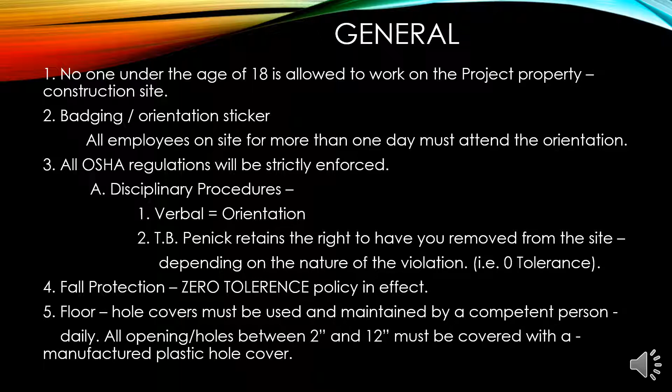Fall protection: 100% tie-off required at 6 feet and above. Zero tolerance will be practiced on all fall protection violations. A full body harness and proper connector equipment shall be used.

Fall protection gear is to be inspected prior to every use and every 6 months by a competent person. Do not use damaged gear. Tie-off point must be able to withstand 5,000 pounds of force.

100% tie-off when working from boom lifts. Employees must be trained on the use of fall protection gear.

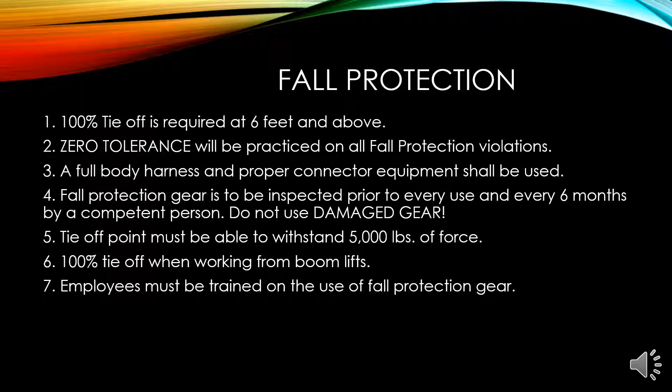Fall protection continued - scaffolds: must be built under the supervision of a competent person who is capable and authorized by employer. Fall protection must be used while erecting scaffolds. Exceptions must be approved by TB Penick & Sons Incorporated.

Standard railing: top rail must be at a height of 42 inches, plus or minus 3 inches, above the working level. Do not tie off to guardrails.

Ladders: No aluminum or painted ladders are permitted on the job site. Inspect ladders before each use. Only type 1A and 1AA ladders are to be used on the job site.

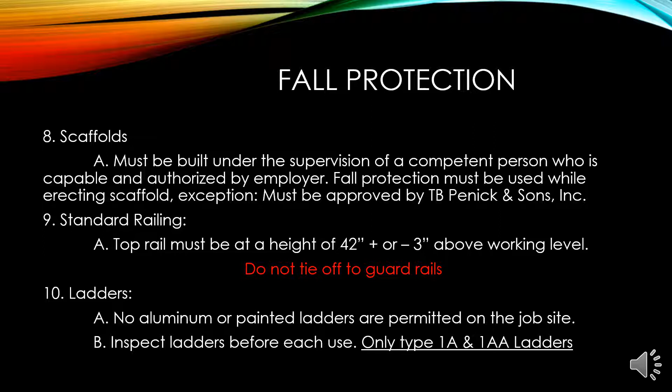Fall protection continued - never use an A-frame ladder as a straight ladder. Never stand on or above the top 2 steps or the top cap of a ladder. Never store materials or tools on the steps of a ladder.

Employees shall be trained on ladder use and safety. Use the 3 points of contact rule while climbing or descending on a ladder. Do not carry materials or tools while climbing a ladder.

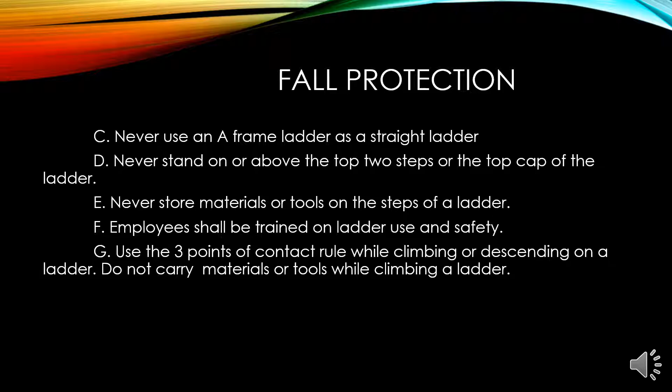Safety enforcement: all personnel are encouraged to ask questions and report hazards. If you are not sure if it's a hazard, please ask TB Penick & Sons supervision to clarify. If you have any questions or concerns, please ask for assistance.

There is a safety enforcement fine system in place on this project. You are accountable for your actions on this project. You will be physically removed from the job site for a gross violation or repeat violation.

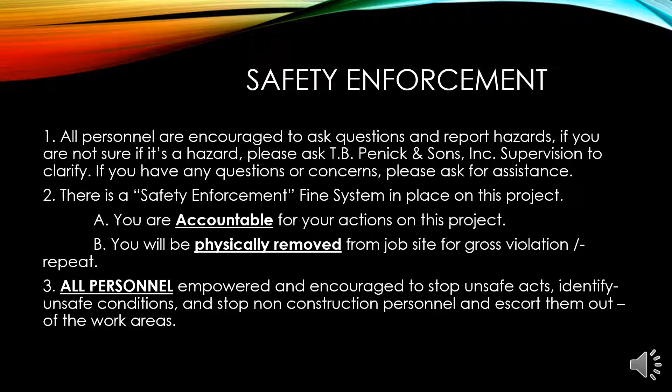All personnel are empowered and encouraged to stop unsafe acts, identify unsafe conditions, and stop non-construction personnel and escort them out of the work areas.

Emergency procedures: in the event of an emergency, notify job foreman immediately and/or TB Penick project superintendent or safety manager. Give the exact nature of the emergency, for example employee injury, fire, etc.

Give the exact area by floor, room number, north, east, west, or south side of the job site. Stay on the phone until safety has confirmed that you have provided accurate information. If an evacuation is not necessary, stay on the scene to provide incident information if needed.

Emergency procedures continued - evacuation procedures: 3 horn blasts will indicate the job site is to be evacuated. Proceed in a calm manner to the evacuation safe zone. Muster points for evacuation will be briefed.

Report to your designated supervisor or foreman for a head count. Do not leave the safe zone or go home until instructed by your supervisor.

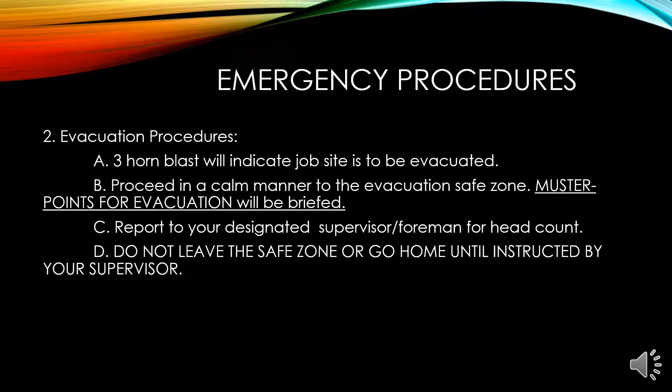Personal protective equipment basics. 100% hard hat protection is required at all times. 100% eye protection, ANSI Z87.1, is required at all times.

Safety-toed work boots are required, no soft shoes allowed. Long pants in good condition must be worn, no shorts. Shirts must have sleeves at least 4 inches long.

Glove protection is required where hand hazards are possible or exist. Ear protection is required in environments above 85 decibels. Face shields are required when cutting, grinding, chipping, etc. Safety goggles are required when operations produce flying hazards, such as from stripping forms or shoring.

High visibility Class II clothing must be worn on site at all times.

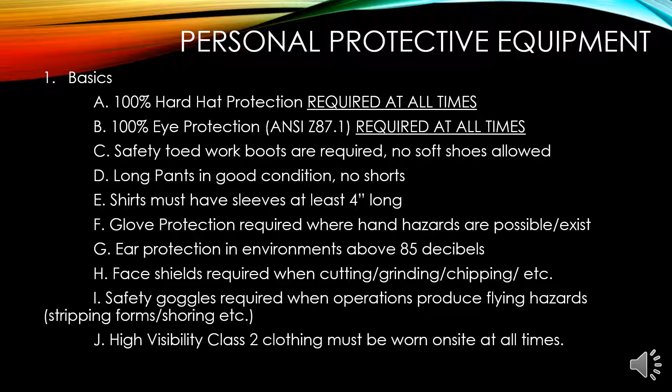Electrical: industrial heavyweight cords with proper grounds are to be used at all times, with 100% ground fault circuit interrupter (GFCI) protection. Inspect all cords and welding leads before each use.

Damaged items must be repaired or removed from the job site. All leads and cords are to be elevated above all main walkways.

All mechanical and electrical systems are to be considered live. Never work on live panels without prior approval from TB Penick, and without following the proper procedures and precautions outlined in the NFPA, NEC, and safety orders.

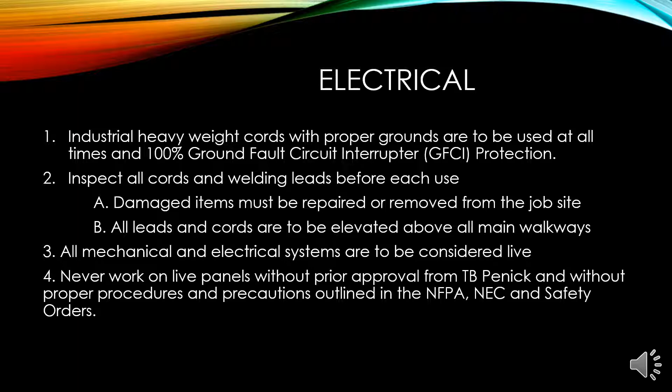Equipment: proper training and certification is required prior to operating equipment. All stops must be observed at intersections and must come to a complete stop. Speed limit is 5 miles per hour or a safe operating speed, whichever is slower.

A spotter is mandatory when view is obstructed by load. Backup alarms are required on all vehicles. No passenger riding on equipment or on the back of trucks or pickup trucks.

Horns and lights are recommended for all equipment. Always follow the manufacturer's operating instructions for all equipment and tools used on this project.

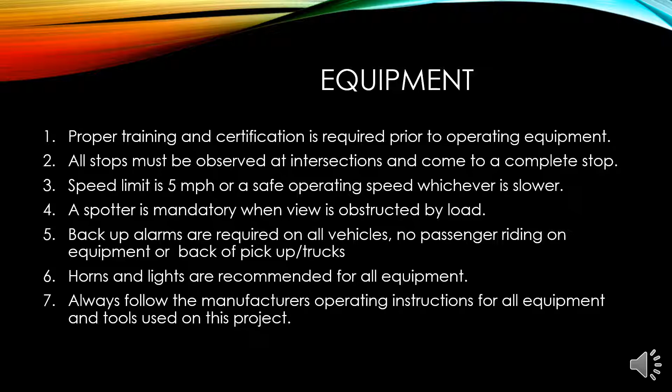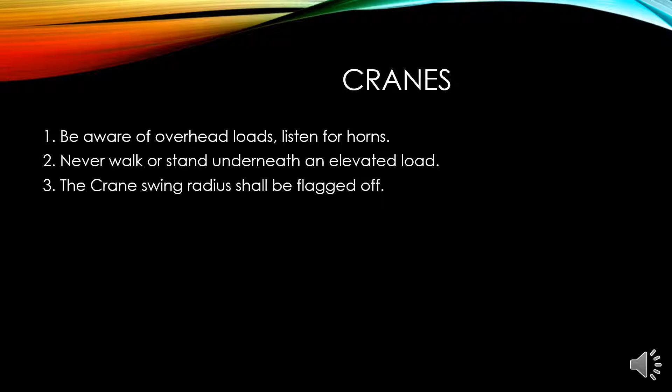Cranes: be aware of overhead loads and listen for horns. Never walk or stand underneath an elevated load. The crane swing radius shall be flagged off.

Barricade tape: there are different types of tape. Red tape means imminent danger exists.

Only authorized personnel performing actual work are allowed to enter a red tape barricaded area. The only exception for entry into a red tape area is with the permission of those authorized to work within the area. Violation of this rule will result in immediate removal from the job site.

Yellow tape means a hazard exists that requires caution. A yellow tape area may be accessed by job site authorized workers who stop to observe the present hazards and take the proper precautions before entering.

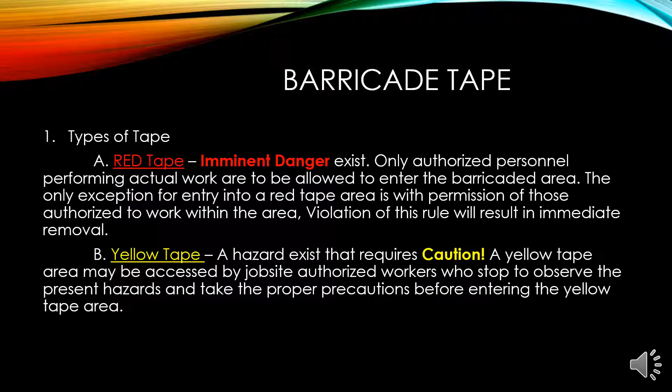Training requirements: workers must be trained and hold valid certification documentation to operate forklifts, aerial lifts, cranes, scissor lifts, and powder actuated tools.

Contractors are required to provide workers trained as required by OSHA standards and site policies. All subcontractors are required to have a competent person who is first aid and CPR trained for the duration of the project.

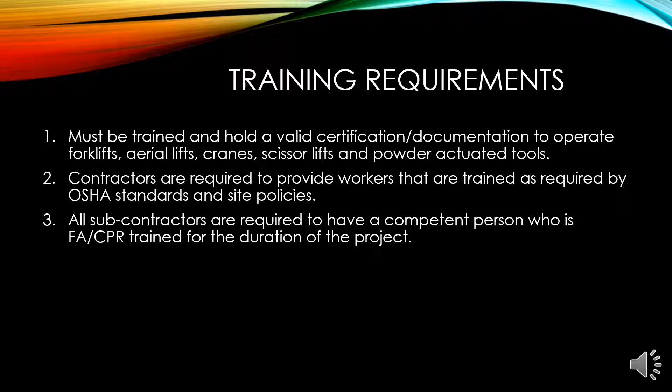Incident reporting: the contractor pays for insurance and all medical bills. Any injuries, illness, or near misses on site must be reported to the supervisor immediately, within 15 minutes of the event if physically possible.

A first report of injury form must be filed with the TB Penick Safety Office within 8 hours after an accident. If transported to a doctor for treatment, all follow-up appointments must be kept.

A temporary modified duty policy is in place. The worker must strictly follow any and all work restrictions issued by a doctor.